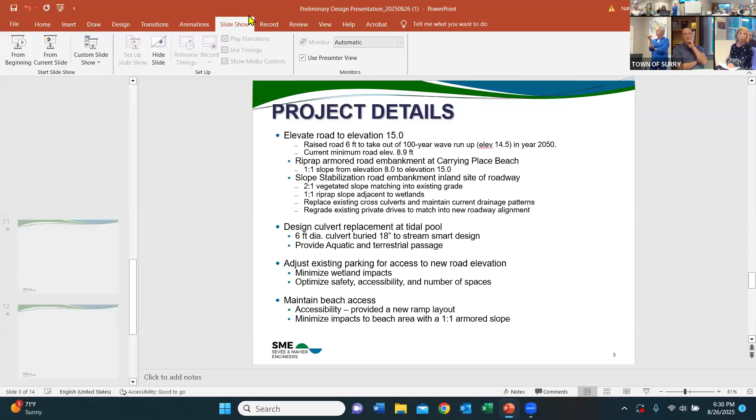Well, I'm going to ask Alan to explain why it's important to get this done in December. It has to do with the congressionally directed spending, and I can explain a little bit more about that.

There are two pieces, at least two. One of them is a congressional appropriation. It's called congressionally directed spending. We used to call it earmarks, remember those? So this is special purpose funding in which members of Congress can designate from an appropriation bill spending for a very specific project.

Senator Collins, Senator King have advanced this to the point where it had this proposal before the Senate Appropriations Committee. The Appropriations Committee has not acted on that. It's part of the Department of Homeland Security appropriation, which covers FEMA, immigration and customs enforcement. So it's very unlikely, we've heard from our representative in Congress, that this will move soon.

When it does move, presumably at the end of the year, I'm saying we, the town, need to be ready with a shovel-ready project so that we can qualify for legislative pre-disaster mitigation assistance. That's the phrase by which we'll get funding.

The current level in the bill is $2.9 million. That could change. It also could mean that we don't get any appropriation. We don't know, that's all up in the air. But we're hopeful that that will go through.

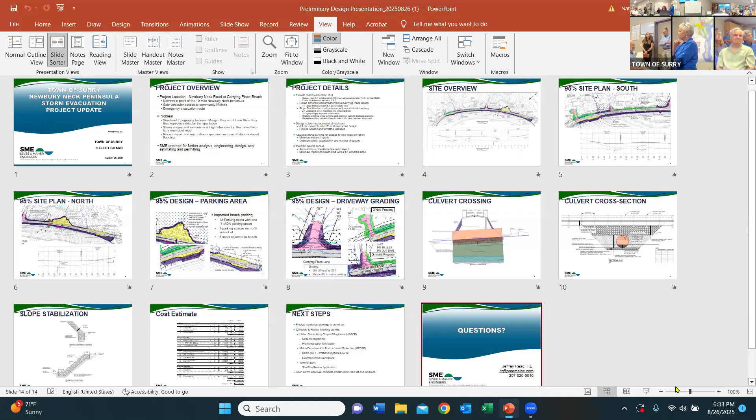And the reason you're here is we've invited you to come and take a look at our crossroads situation with the Emmons Brook Marsh that is being destroyed by this tiny culvert. And then we persuaded you to come down and look at Newbury Neck Road at Carrying Place Beach and take a look at that, where that project hopefully will take place eventually.

So, yes, thank you very much. It's beautiful, I'm pretty excited to come here. It's gorgeous, I have actually never been to Surry. I'm from Maine, but from the Augusta area, so I don't come out this way all that often.

And what is the life of a permit if funding is not immediately available? So you have to go through the permitting process again at some point? Jeff, do you have experience with that? It depends on the permit, and I'd have to check.

I know like a site law permit, you get 7 years from the start. You have like 3 years to start construction and then 7 years to complete. The permitting we'd be looking at here would probably be shorter duration. If we wind up doing a town site plan application, those are usually a year with a 1-year renewal. By coming and saying, well, we don't have funding yet, so we'd like to extend it for a year, that usually caps it. I think some of the federal permitting is close to 3 years. I can actually dig in and find those dates for you, but each permit's got a little different shelf life.

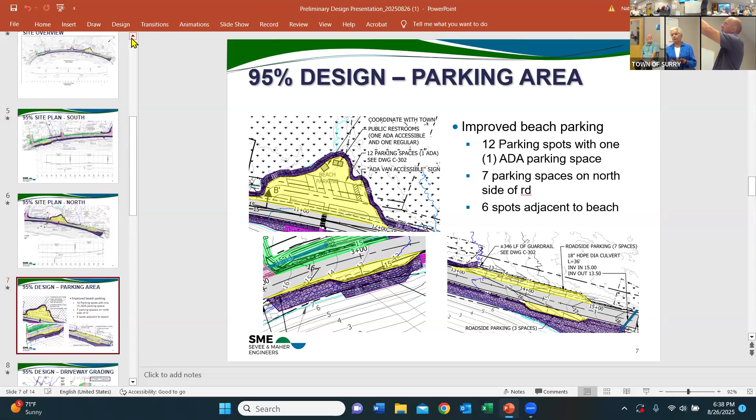I'd like to interject here, there's an area called the Pines, and I walked it with one of our residents, Steve West, about a month ago. It's all owned by the town. There are a couple of granite benches in there that Steve and Linda put in, a lovely spot. It's not that we have a big pile of money, but it might be a place for a bus to stop, and it wouldn't be that expensive to level off the gravel area there.

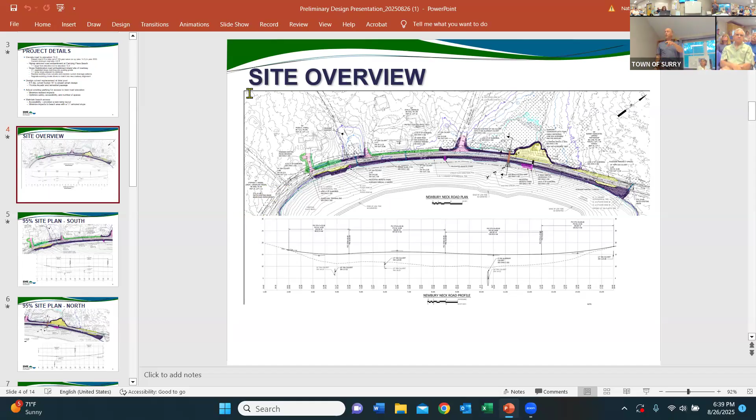And have a bus be able to pull in and pull out. I'm thinking we may be able to use that little loop as just a drop, because right now it's set up as one travel lane wide, about 12 feet, and that's what we'd need to maneuver vehicles. But if we have a smaller bus, we'd still need the turnaround in addition to the stop. So we could take a look, we've got software that does AutoTURN analysis we could use to check that.

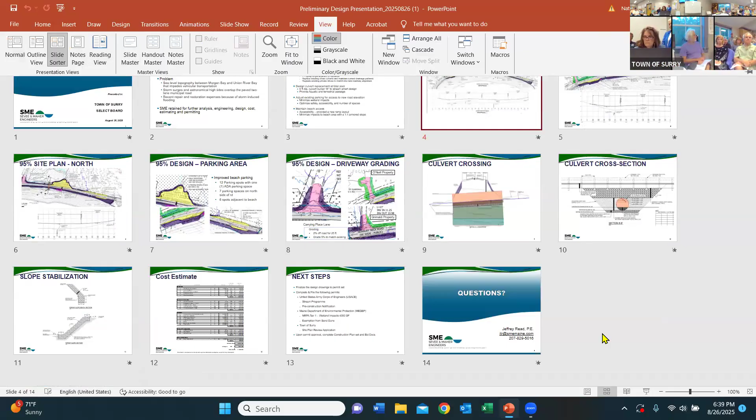Follow up on that. Yeah, Moira. You have 11 acres that the town owns where the parking lot is, and you're putting in a turnaround for the fire trucks for water access. Why wouldn't you just use that? There's a level area right there. When the cistern goes in, we'd have a turnaround for the fire trucks, which would accommodate a fairly decent sized bus, or a smaller one. Thanks, Moira, I forgot about that. That's a great point.

Could you talk a bit more about the water side armoring? I'm having trouble visualizing how far that's actually going to encroach on the beach at high tide or low tide, because at high tide it's not... You've talked about it a couple times and what I'm getting in my mind is it's straight up and then it goes like this. So how?

No, so, the detail on the bottom, right over here, if you just make that bigger, make it just a little bit taller. So this big block of stone here is in the ground, it's underground. The ground surface is right here.

So the beach would be right at that break, and you'd have a slope starting right there in the sand. What we did was set it up so that we try to maintain the toe, so that point right there is right where the bottom of that stone is now. It's going to work back towards the road so we could protect and maintain as much beach area as we could.

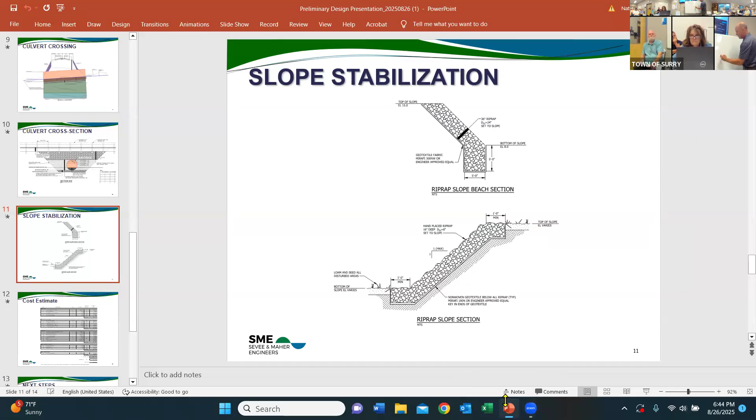So we have the toe, right, and that's gonna be a 5x5, and then we're gonna have the beach here. Beach here, and then this is gonna come back at a 1-to-1, up to, let's just say 6 feet. Sorry, that's upside down, left-handed. And then from here, we're gonna come over - slight slope for shoulder, road, and down. And then we'll have guardrail here, so some of this might actually extend underneath the shoulder.

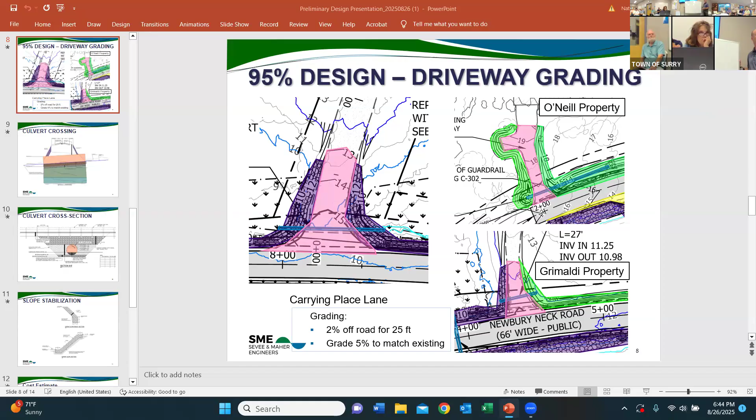But at the exposed areas, that's what you're gonna see. This is gonna be 3 or 4 feet thick probably, because it's gonna be heavy riprap, close to the size of the blocks that are there. It needs to be to dissipate the wave energy and not get thrown around.

Would you use some of the existing riprap stones? Yeah, absolutely, if we talked- that can be more...

That's not something we typically address with permitting, which is where we're going right now. But when we convert to construction drawings, at that point we'll be able to quantify that and say, when we develop our plan, remove, store and reuse or reinstall the material that's there. Obviously anything we can reuse here, we want to. I'm even thinking some of the granite steps - there's nothing wrong with it.

Can I just back up? Sure, follow up, okay. So thank you for that - helpful for reference.

I read something in the Q&A though, that at the bottom of the toe there, you're gonna end up with a 6 foot or 4 foot deep channel across - that was in the Q&A stuff that was handed out. So if you were to cut this thing through and look at it sideways, this is gonna be a 5 foot wide by 5 foot deep trench all along the bottom of where the wall is now, running parallel to the road, parallel to the water.

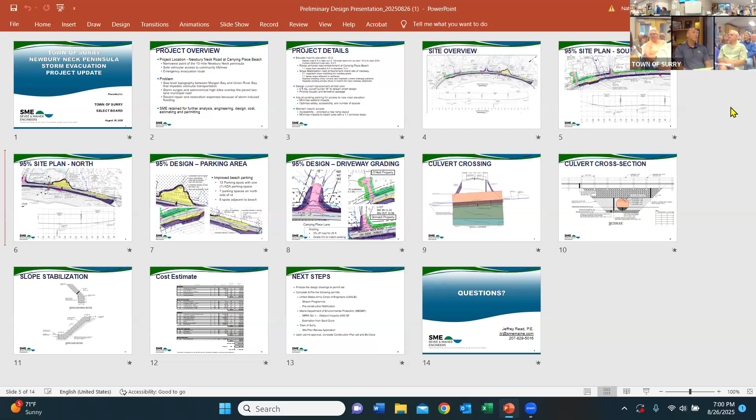And then I'm just thinking the contractor's gonna drive up the cost for that, the phasing on this will increase the cost. It will, and we've included a factor for it, but who knows what it will really be.

I have a question, we have two more questions. About construction, once permits are in place, funding's in place, and all that happens, like we think it might. How long does construction take, start to finish the process? Well, for something like this, I would expect they could get this done in less than a year.

So back to the point here, right? If access was not a problem and they could just come in and blow this thing out and get it done, they could get it done in 3 months. Well, but access is a problem. So access is a problem and it's gonna impact the price and it's gonna impact the schedule.

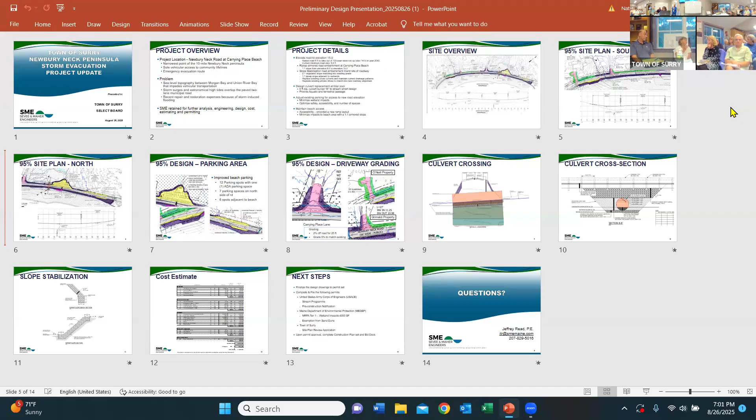So do you foresee there being one lane open at all times? Yes, absolutely. Is there a red light and a green light to direct people, or are there flaggers? The traffic control is typically similar to the phasing, right? We typically leave it to the contractor as to how they want to do that, as long as they can maintain standards and something that's safe. On a project like this, and the duration of a project like this, they're gonna wind up doing the lights probably. They're not gonna have flaggers, that would be too expensive and cost prohibitive.

I've got two more, thank you. Sure, two more questions, Kit and the gentleman, Paul. Kit first - what's the life expectancy of that geotextile?

The service life for it? Boy, I have to check. We're talking about 2,100 here, that long. It doesn't rot, it doesn't biodegrade. What you would see on a product like that, typically the biggest impact would be UV, but because it's gonna be buried, it's not a factor. It's not gonna be in the slopes that are exposed. Once it's not exposed, it's gonna be underneath either soil or underneath rock or underneath something else, so it won't have that light degradation.

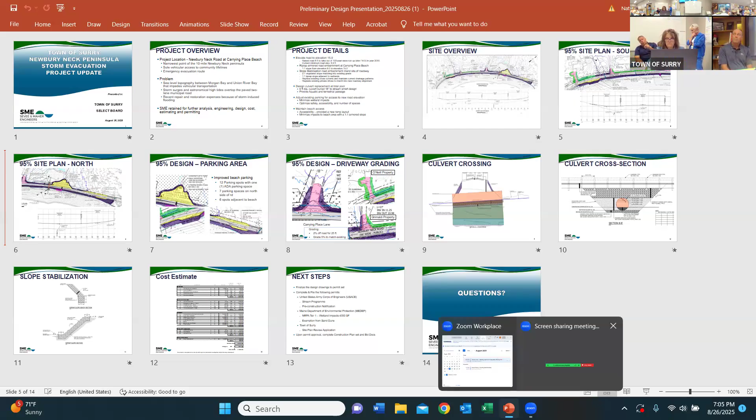I'm just curious, in resolving one problem, are we creating another? Meaning, the way that cove is set up, at high tide the storm surge coming out of the southeast, most of that water is coming directly to Morris House. It took the path of least resistance, which was on the road. So if we raise that section of road to 15 feet, when the surrounding road where all those homes are on the bank is at 11, are we now forcing that water instead of going over the road, under those homes and crossing the road over there?

Would it not be more practical for this section of road to be not higher than the remaining road that is susceptible, where all those homes hang over the edge of the road? Right, but if you do that, then you're providing a gateway in, so as big storms and sea level rise come, then you're giving the water a way to get into the salt pond, and then it's trapped behind the higher sections of road, and it's still doing that.

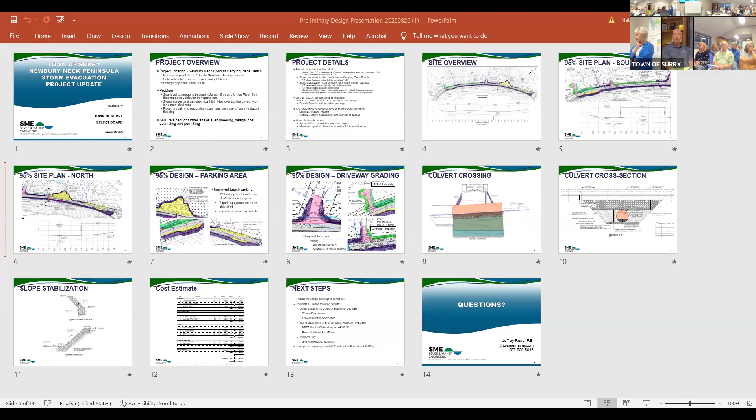Oh, you asked them - hopefully they'll have them for you. Sometimes they'll do that, just say, hey, make sure that I'm included on the bid list.

I heard some really great questions from all of you tonight. This is how we're gonna make this better if we go forward with it. These are the kinds of questions we haven't thought of probably, and we're relying on you to raise these issues that are concerning you. I really can't thank you enough for coming out and helping us get to a solution for this area of the road.